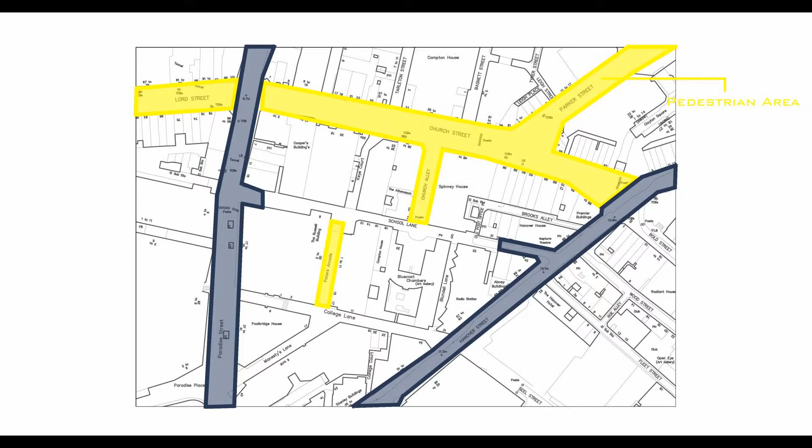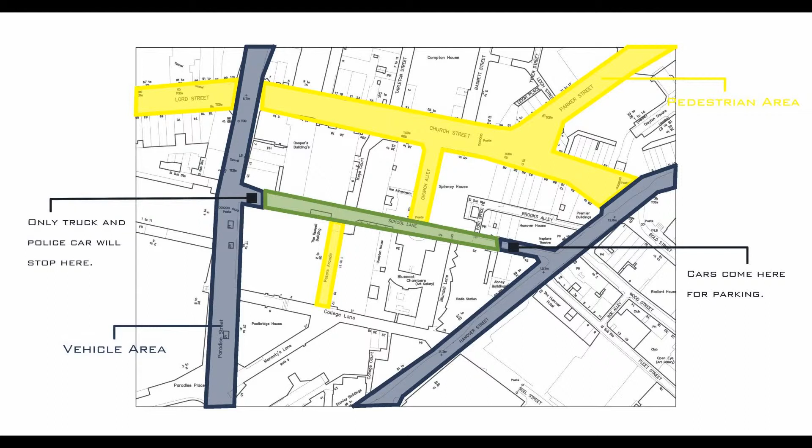Considering the traffic situation, Church Street, Church Alley, and Peter's Arcade are pedestrian areas. Paradise Street and Hanover Street are vehicle areas. In the west side of School Lane, only trucks and police cars will stop here. In the east side of the lane, cars come there for parking. It can be seen that School Lane has few cars passing by.

Around School Lane, most people come to the shopping center, the red area. They also have an art studio and some catering areas.

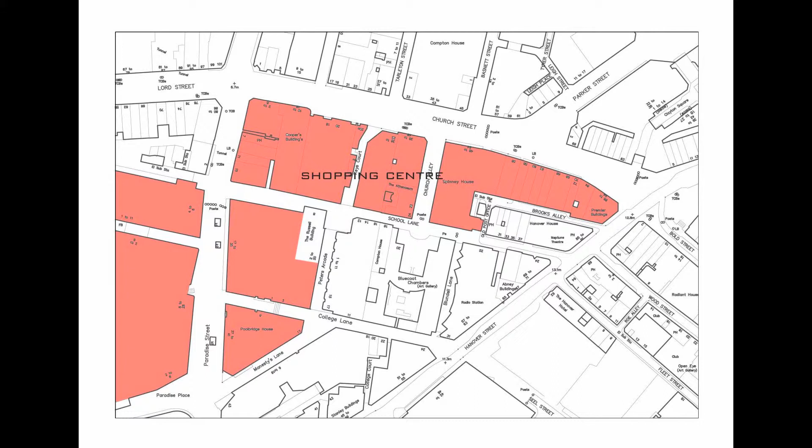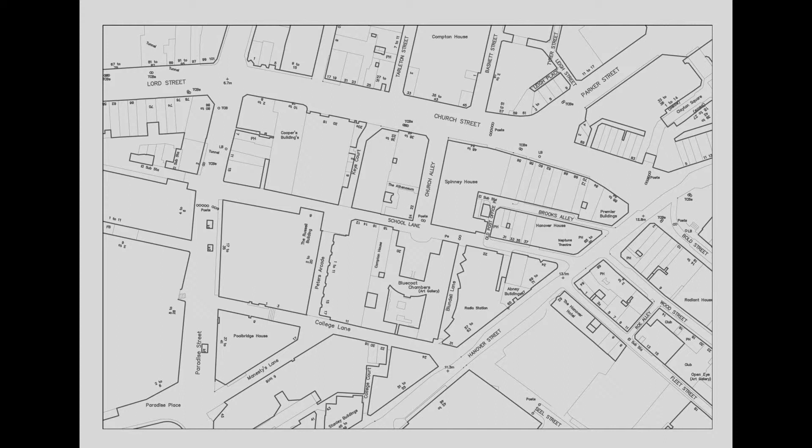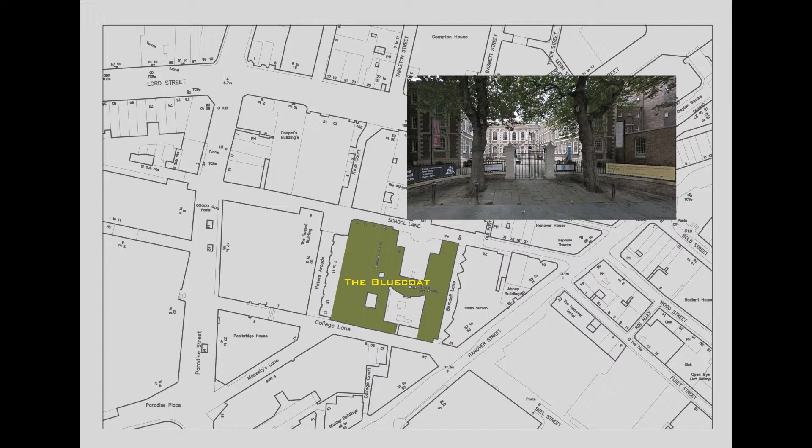In detail, there is a car park in the east side of School Lane. Near the car park, there is the Quaker Meeting House, where homeless women can have food and also communicate with others. The Bluecoat is in the middle of School Lane. There are art studios, cafes, and art shops. Next to the Bluecoat, there is a cafe named Chocolate in Liverpool One. At the beginning of the lane, homeless women can have a meal in the Abbey.

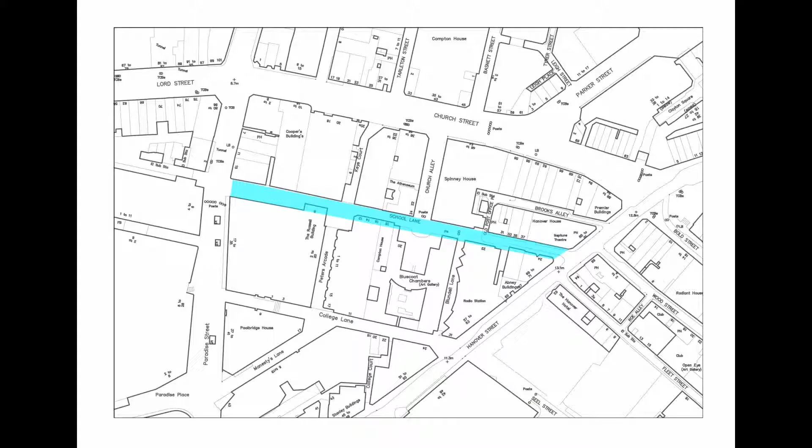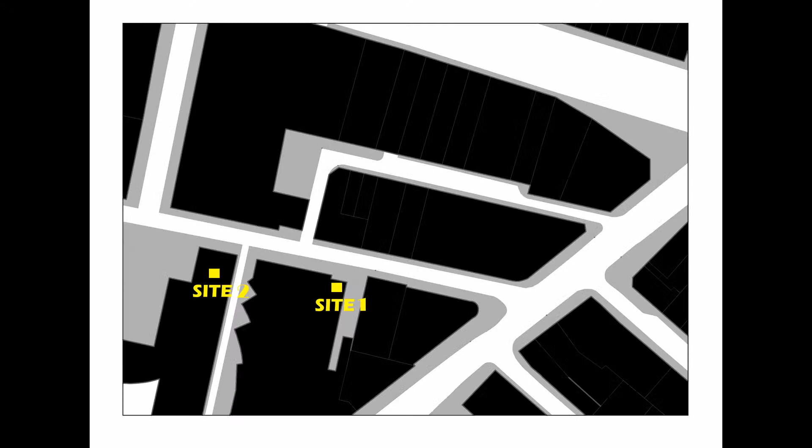Thus my choice is School Lane. The first site is near the car park. The second site is near the Bluecoat. The third site is at the end of the lane. Coming across School Lane from east to west, there are 5 views for the sites.

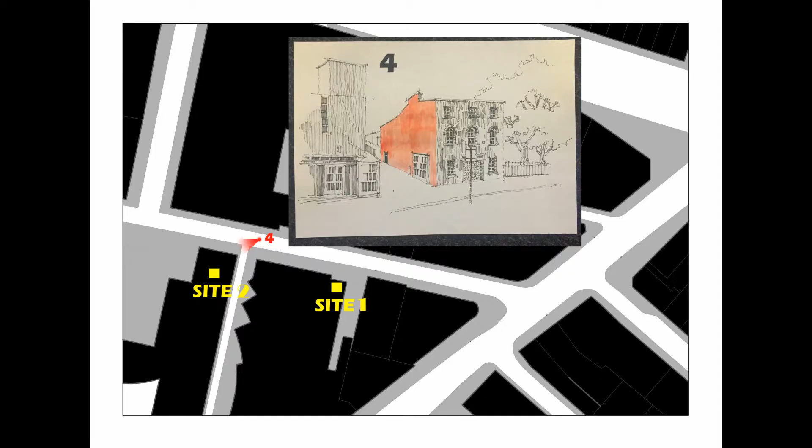Peter Zumthor wrote in his book that when they were talking about a project designed by a respectable architect, a young member didn't like this project. Although this building was interesting from the view of theories and practice, it had no soul. Thus Peter Zumthor started to consider buildings that provide people with the natural spatial conditions appropriate to the way people are feeling. There is a space in the Tadao Ando's Benetton Research Center, which is directly lit by the circular skylight on top, a narrow corridor with a large scale of depth and height, which could meet the required space atmosphere of rational, serious, and calm.

The most distinct character of homeless women is their sensitive mental condition, which is mainly fear, sad, anxious, and curious. When they feel sad, it's like all the things are falling down with tears. The whole body is going to collapse. They need a space to hold them.

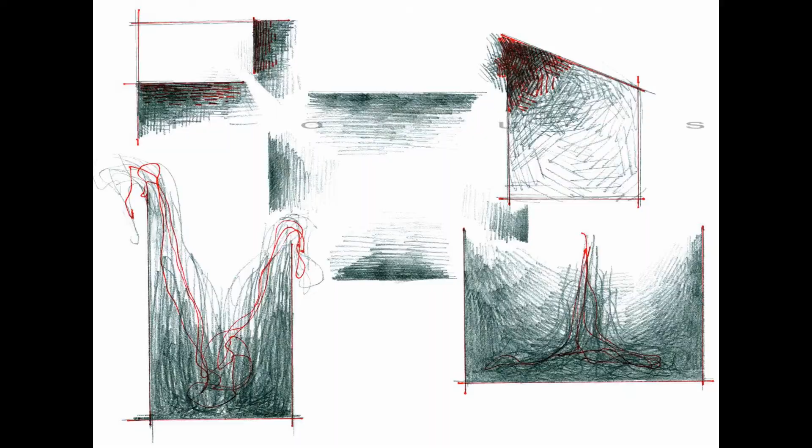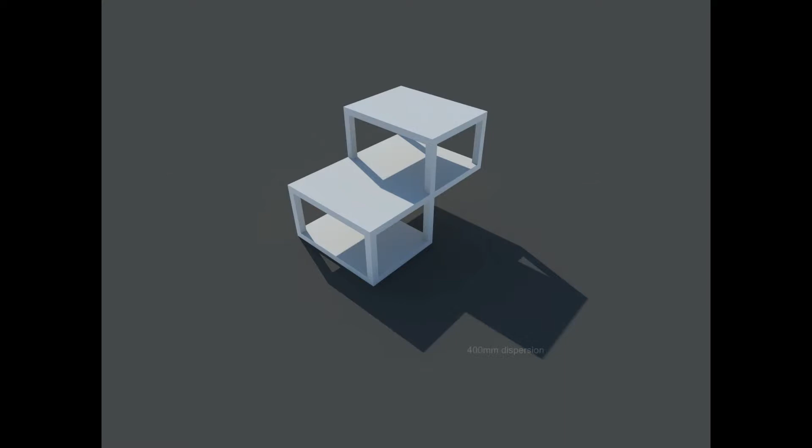In the plan, the main area includes the foundational functions such as the entrance, toilet, and bathroom, while the 4 different areas don't have clear functions, but depend on the different space scale of different body postures. For example, 400mm dispersion can be used as steps or a chair at a desk. A 2000mm long, 1200mm high space can be a sleeping area and also a quiet reading area.

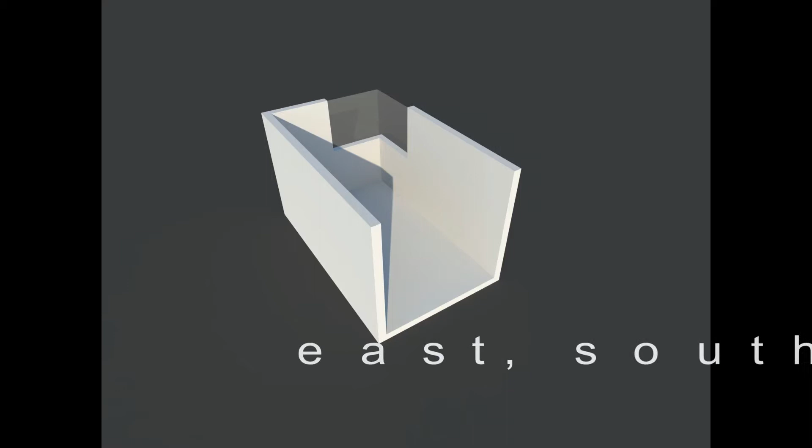In the east and south of the shelter, there are windows on the roof. Users can enjoy daylight and also observe passersby. Every space has a different way of use, according to the user's mental condition.

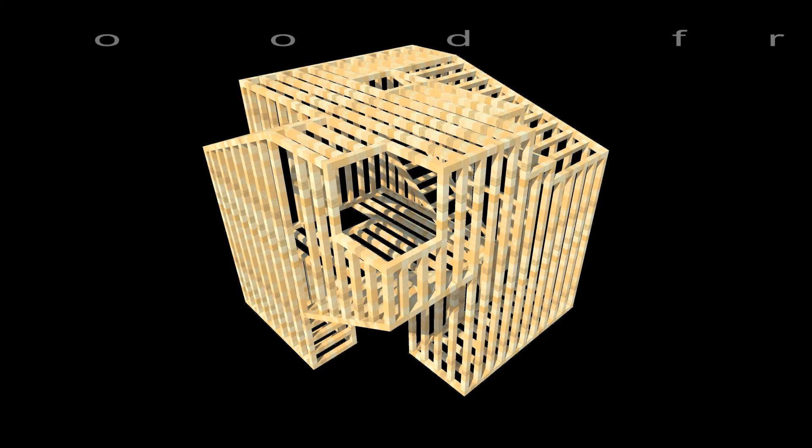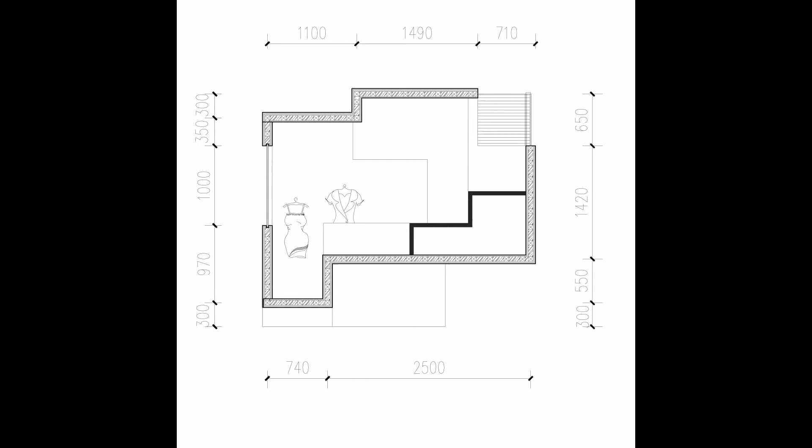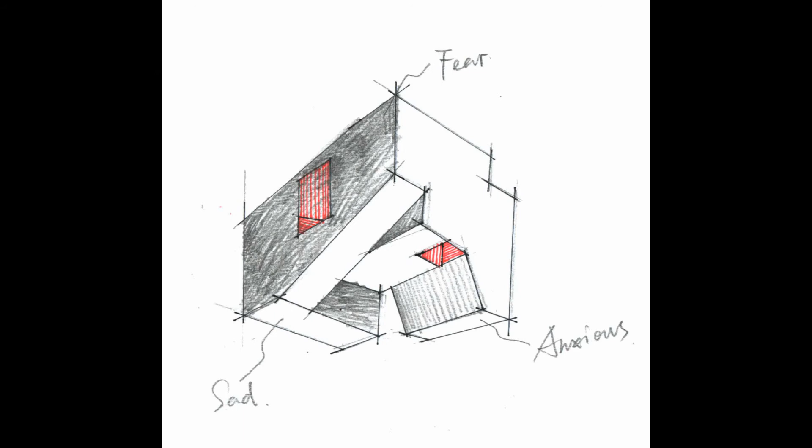Considering the sites, the 2 most open spaces, curious and anxious, will be at the east or south part of the accommodation, and most of the windows are around these 2 spaces. The other 2, sad and fear, are more secret, which will not have a direct window in the space. The red area in the pictures is the window area.

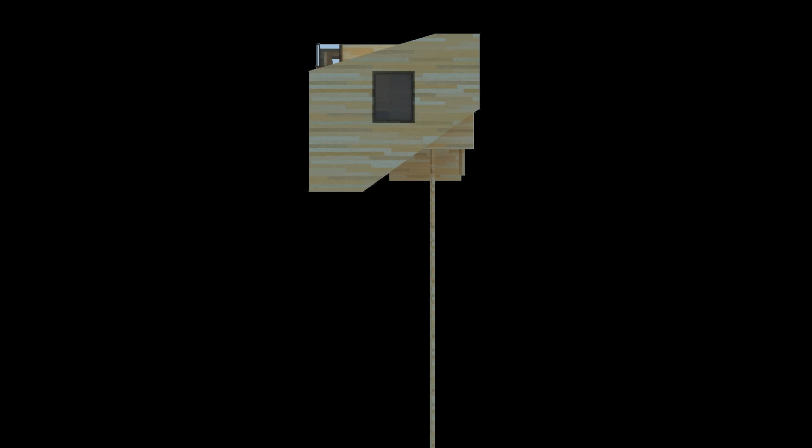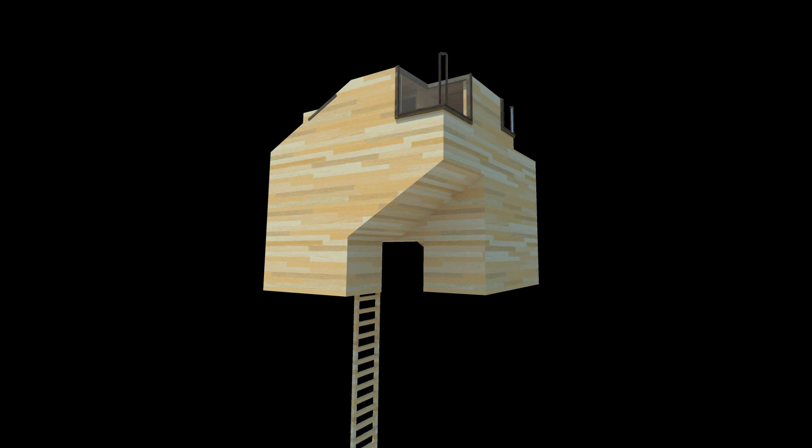In the curious space, people can directly see the outside world through the window. In the sad space, people can only see a piece of the outside world through the window when they sit in the space, but if they lie in the space, they can see nothing. The window in the anxious area is on the roof, thus releasing the pressure of the people. The fear space is the most secret space, which cannot see the outside world directly.